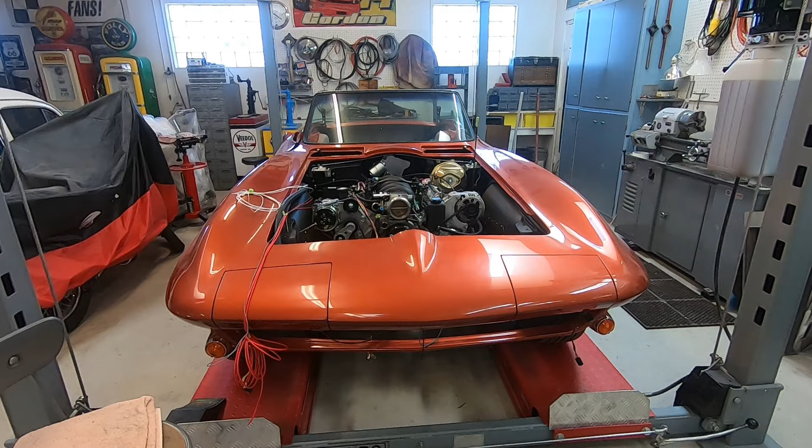It's been a while, but the body is back on the frame now. So I'm going to go ahead and put the condenser onto the radiator, get that installed, hook up my hoses, my electrical wires, try and get everything under the hood finished.

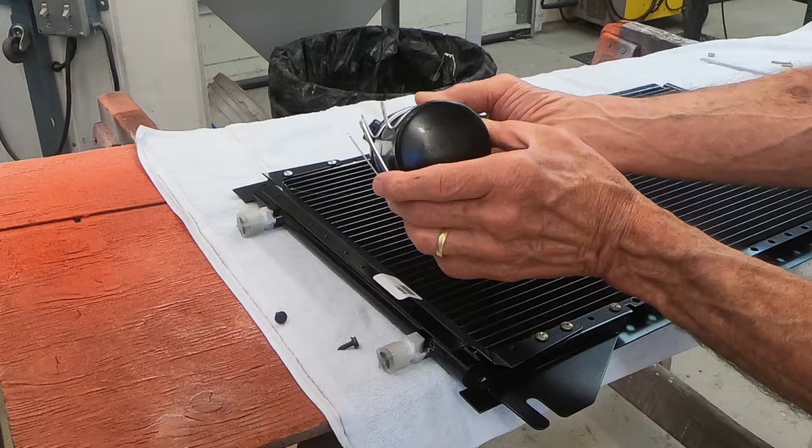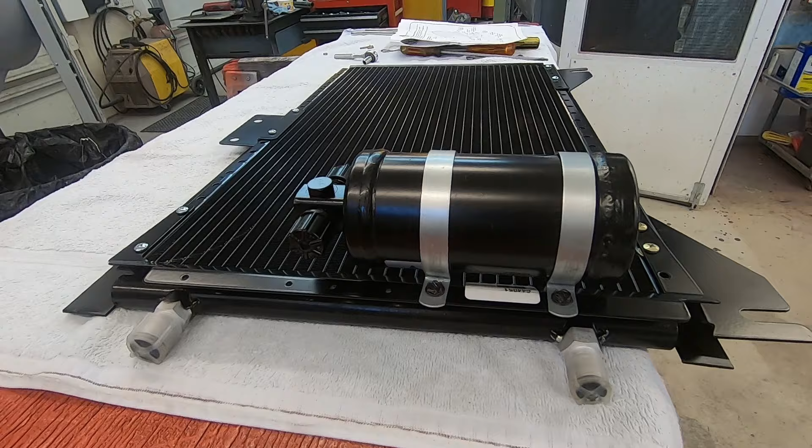Dryer will bolt right there with these clamps, just like that. And it does have a flow direction, so you need to pay attention, make sure you get that in the right direction. Just a couple screws right here that hold it in place. Now I've got this little line that will attach the dryer to the condenser right here.

If the little rubber plug doesn't come out with the cap, be sure to remove that. We'll drop a little mineral oil on them.

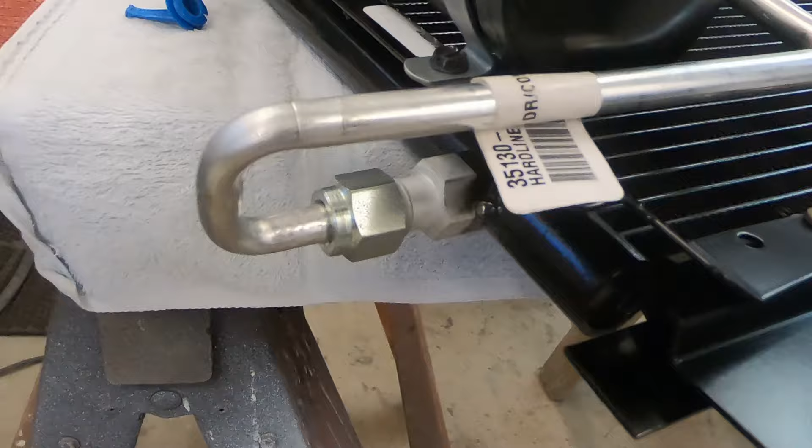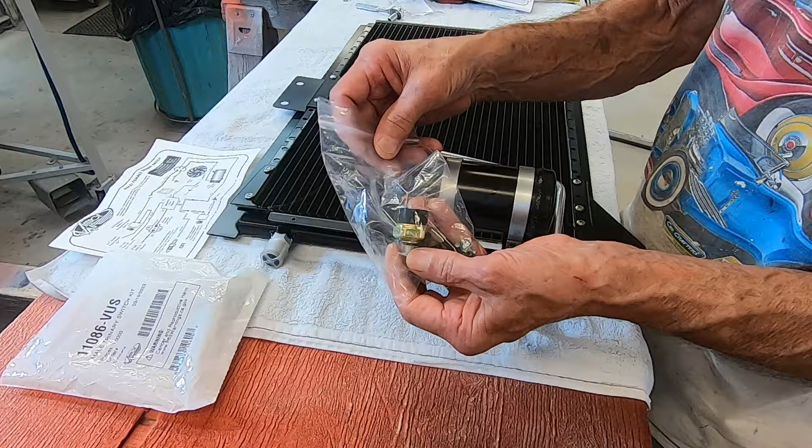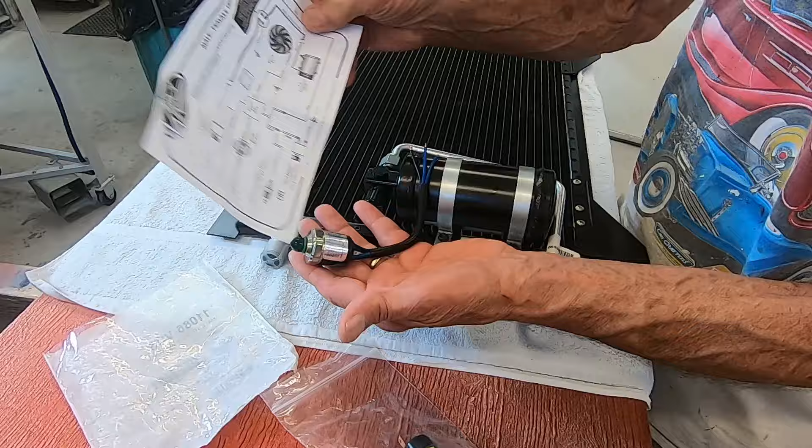One more thing I need to do to this condenser assembly before I mount it on the radiator support is put either a binary or a trinary switch in the system, and it's going to go right here at the top of this dryer. The kit comes with a binary switch, got 2 prongs on it, but I bought the optional trinary switch. That's this one here. It comes with the switch and the instructions, and it's got 4 wires coming out of it.

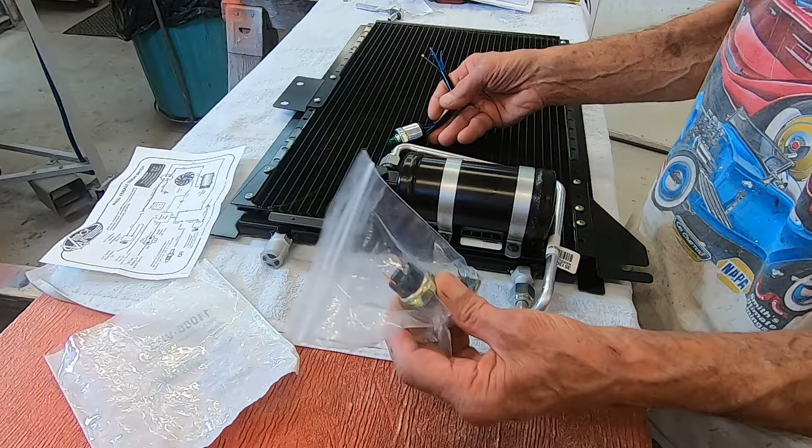And if you have electric fans, which I do, the trinary switch is what you want to have. The binary switch protects against an overpressure or a low pressure situation. It'll cut the compressor off. The trinary switch, 2 of the wires perform the same function as the binary switch, but then the other 2 wires will automatically kick the fans on anytime the air conditioner compressor comes on, because you don't want to run the air conditioner compressor without air flowing through the condenser.

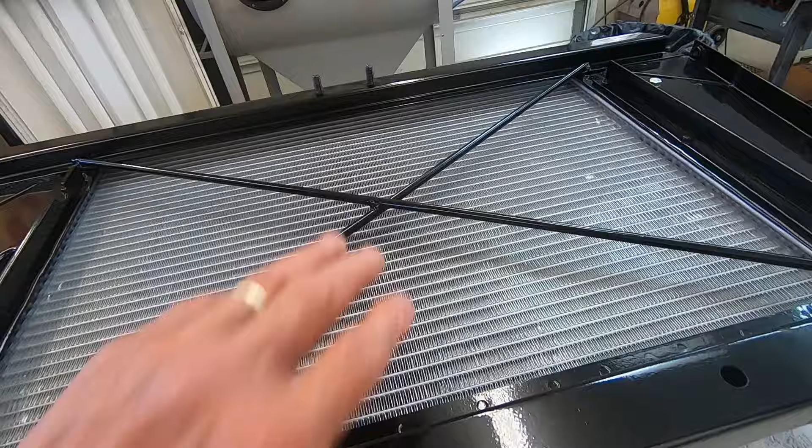It's got a little O-ring, so we'll put a little oil on that. I'll snug that down, and then that's installed. The condenser will just mount right on the front side of the radiator support, front of the radiator. This radiator I'm using has got dual electric fans on it. It's a DeWitt's brand radiator, really nice, high quality radiator, all aluminum.

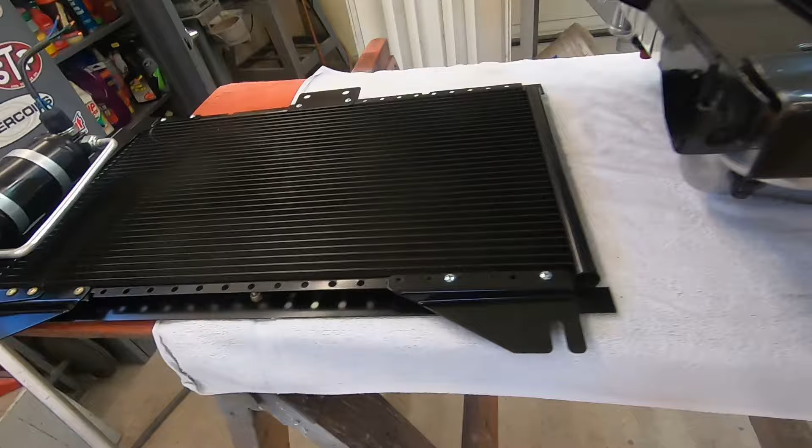And before I set the condenser on there, I'm going to point out a couple of extra things I did. You see these little angle brackets here running the full length on both sides are just made out of aluminum. I've got notches in them for the fittings coming off the condenser. On the condenser, I've got these sheet metal extensions, top and bottom.

It just lays right in there. A couple of nuts go on here, and I won't put bolts through here yet. There's 2 bolts that'll go here and here, but once it's in the car, I've got some little support pieces that go from here up to the fiberglass body in the headlight area.

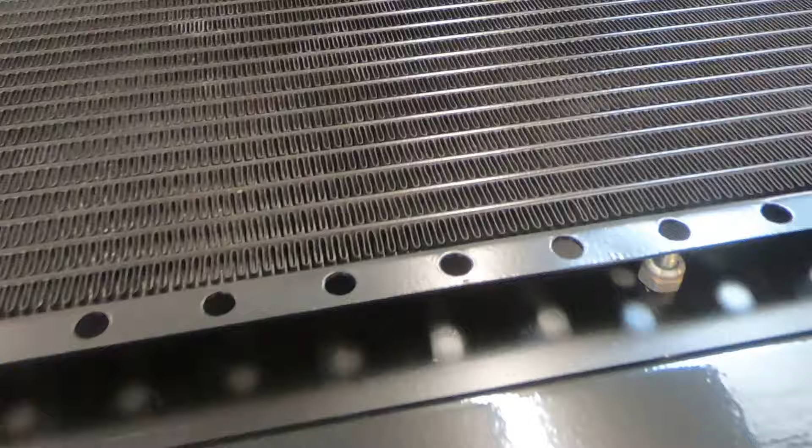And the reason I put these pieces along the bottom here and these angles on the side is just to keep air from sucking in around the sides of the condenser. Now all the air that gets pulled through the radiator also gets pulled through the condenser.

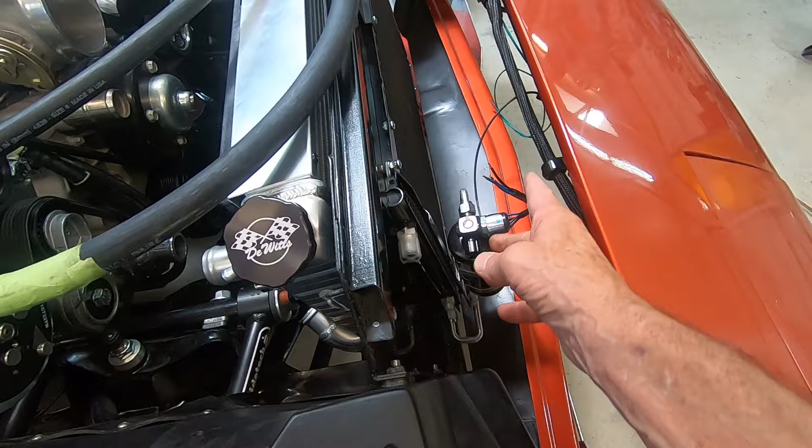Got this all bolted down now. So now I can run my electrical wires off this trinary switch. But before I do that, I think I'm going to go ahead and make my hose connections, get the hoses routed, and then I can run the wiring. It'll be easier to route the wiring around the hoses rather than vice versa.

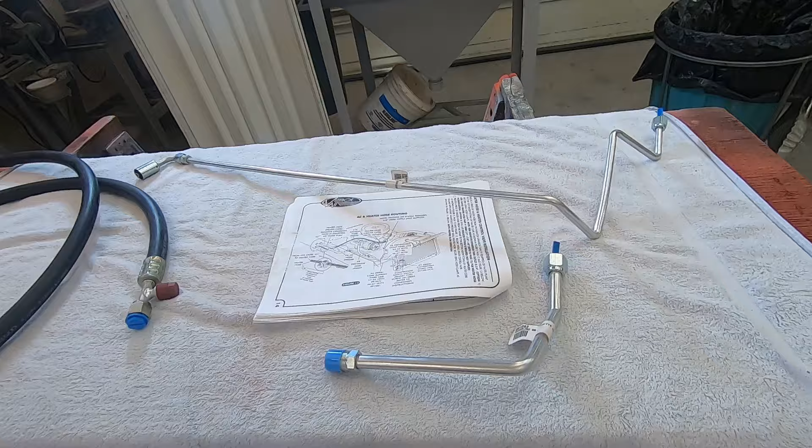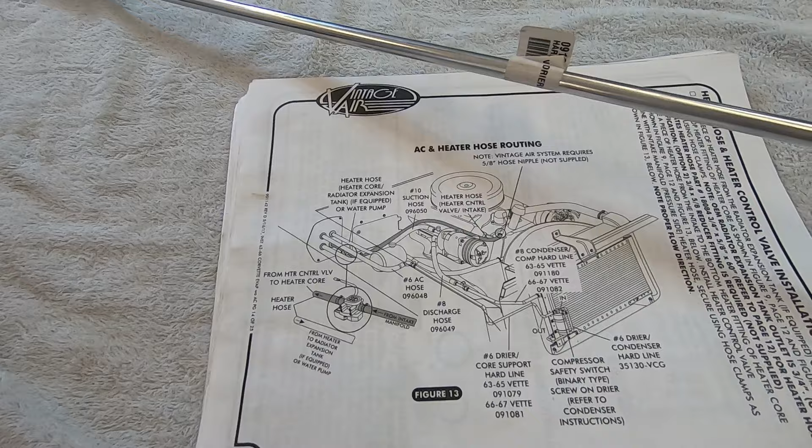I've got a couple of hard lines that go in there. This is another number 8 line with a fitting on it. And basically the instructions are pretty self-explanatory as to how the lines are routed. I've got my hard lines attached, and I had to kind of bend them around just a little bit to get them to fit, but it's aluminum tubing, so it bends real easy.

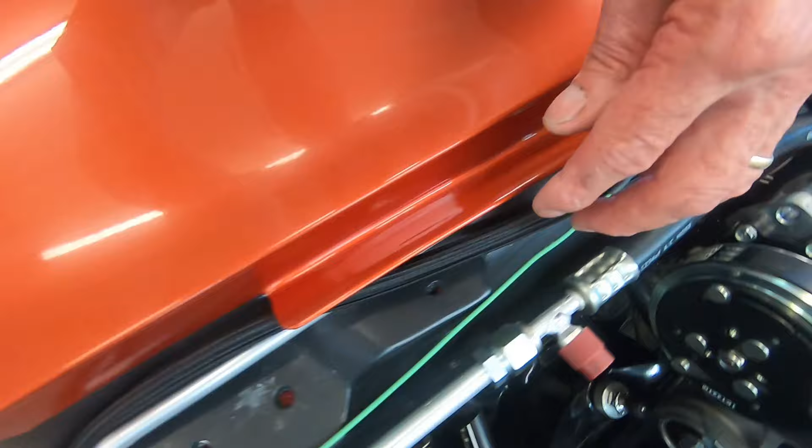And I've got my hoses cut to the proper length. I've still got to crimp these fittings here. There's another one right around the corner here. Now I'm going to take this wire off of the compressor, and I spliced in an extra long lead right there because I'm going to tie that into this harness, which is running along here, carrying the wires to my electric fan. So I'm going to feed this into this harness, and then it's going to come down and around, and then it's going to come out right here.

And this green wire coming from my compressor is going to attach to one of these black with a green stripe wires off the trinary switch. The other black wire with a green stripe is going to attach to this blue wire, which comes from the AC relay, which mounts inside the car.

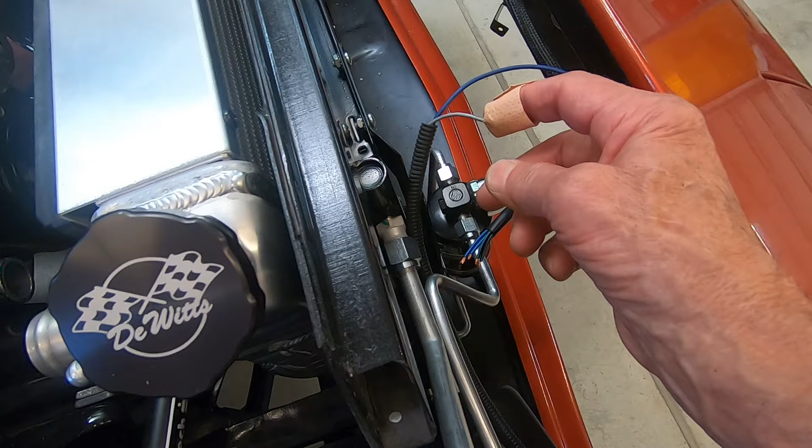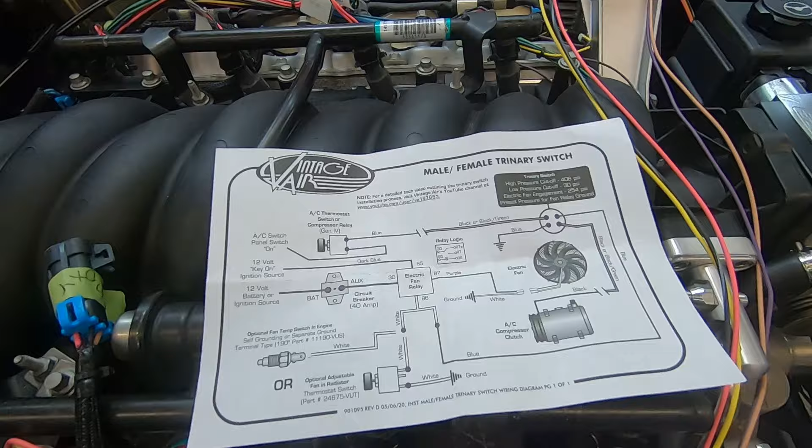And then the 2 blue wires that are coming off of the Trinary switch, one of them goes straight to ground, and the other one is going to splice in with this gray wire here that is coming from my fan relay, and it's going to feed through here, and I'm going to attach both of them right here to this little temperature sending switch that's mounted in the radiator. And basically I'm just following instructions on the Vintage Air Trinary switch schematic.

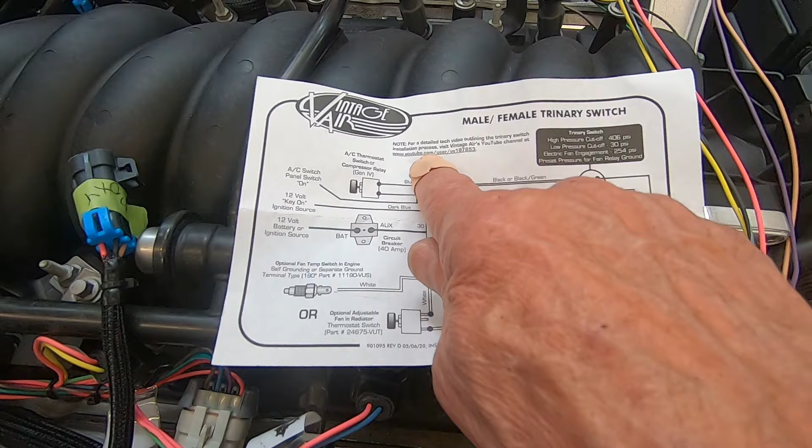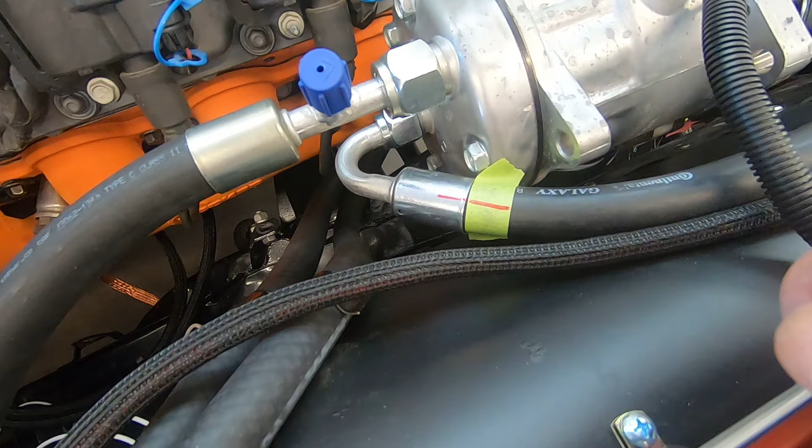That was helpful. I'm getting ready to crimp all these fittings. This one here I'm going to do first because I can take it out of the car. And what I did is put some tape around the hose and then made a mark on there, so when I get it out I'll be able to get it aligned properly. Here it is all set up and ready to go. This is just a little beadlock crimping tool that I bought. Comes with all these different size dies for the different size hoses.

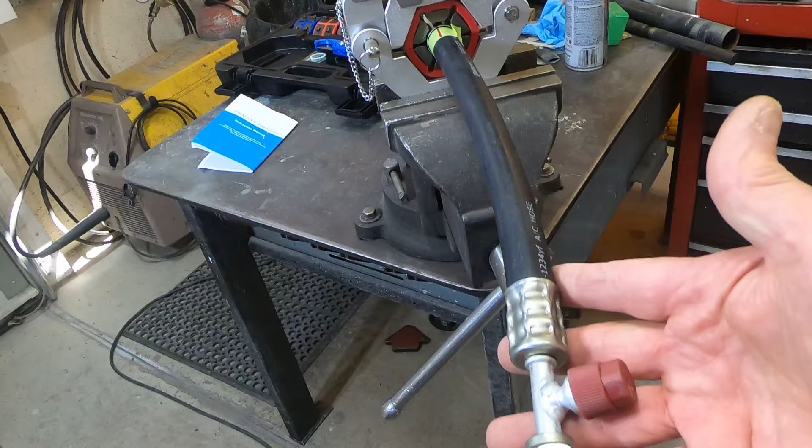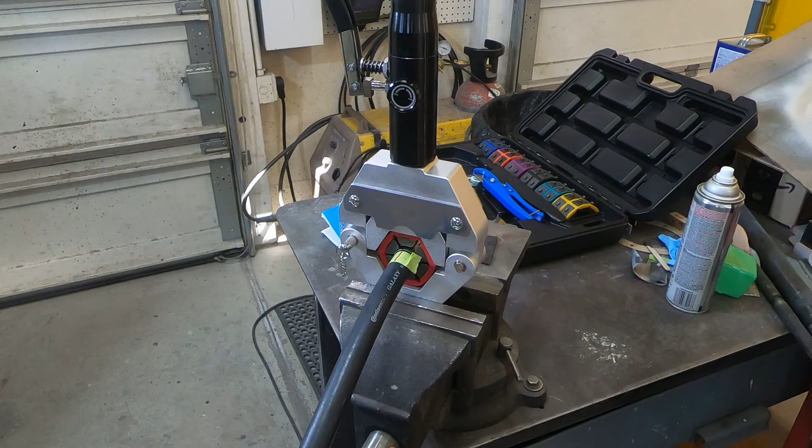And in the past I would just take these hoses to a shop and let them crimp them for me, but I don't want to pull those hoses out that are already attached to the evaporator over there. So I bought this tool off of Amazon. It was 115 bucks. So I'm going to just try and do it myself. I'm making sure my marks are lined up, and I put the tape right at the edge of the fittings because if it gets pulled back I'll be able to recognize it easily. So it's right there. So I'm going to go ahead and start crimping this down.

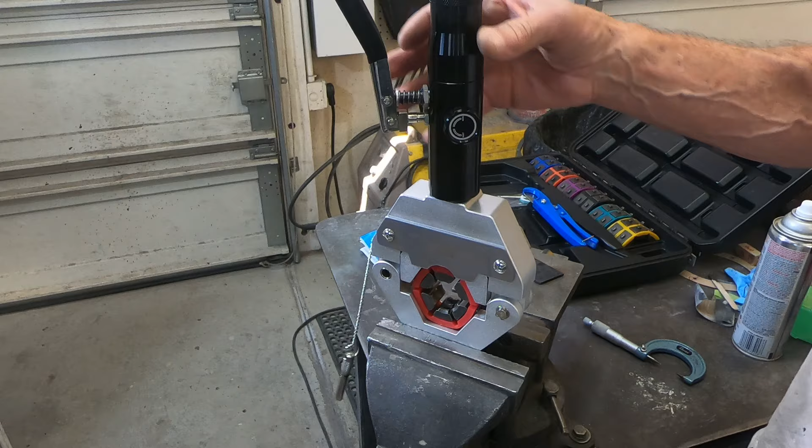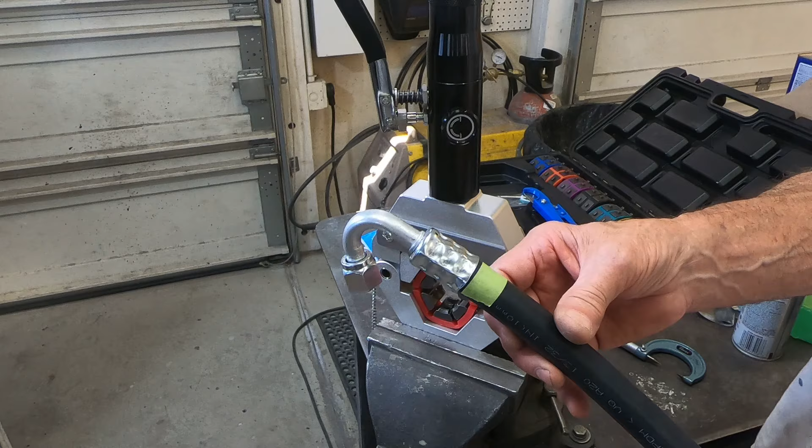Basically what it turns out is you can compress this until these jaws are all touching each other, and then that puts you right where you need to be. So there's one done. Looks pretty good. That's what came from Vintage Air. Theirs might be a little cleaner than mine, but they probably have a lot more expensive tool than this one.

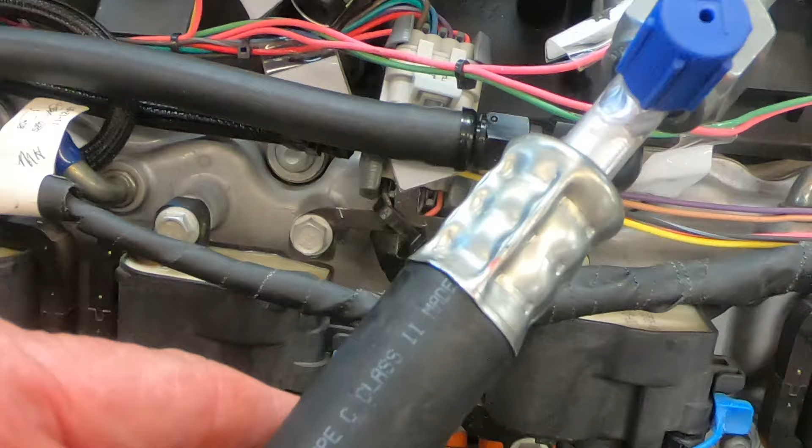All right, I just did this big number 10 hose. And what I'm finding is that you need to, at least on this tool I got, crimp it from 2 directions, 0 and 90 degrees. If you just do one direction, some of the crimps don't look like they're completely put in there. And so if you rotate it 90 and then crimp it again, it gets to be a lot more uniform all the way around. So that's that one. And now I've just got this little number 6 hose to do.

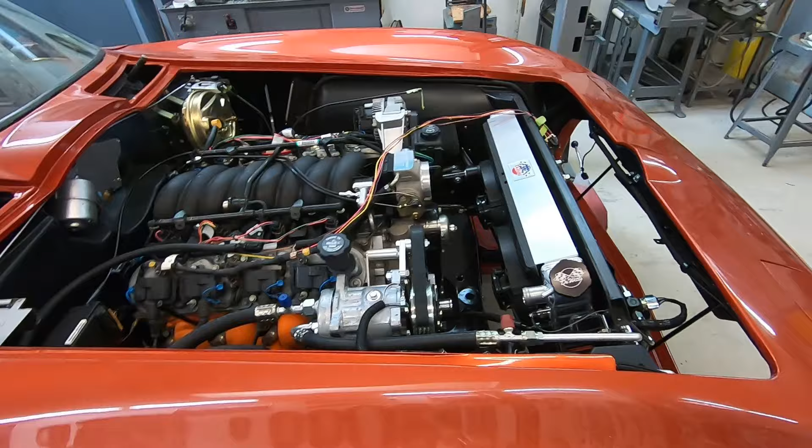Okay, I've got my number 6 dies in here. Got my marks made right there where it needs to be oriented. Make sure the hose is pushed all the way in, start cranking. And I believe that concludes everything that needs to be done under the hood.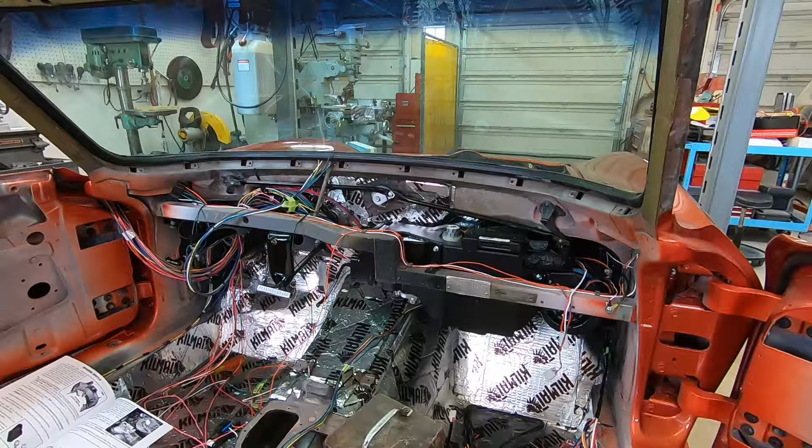I don't have the dash back in yet, but that will allow me to go ahead and easily hook up my wires. This harness here comes from the firewall, and on the other side I've got that circuit breaker and the positive battery hookup, and then also negative battery hookup, and then the other wires that run out to the compressor and the binary switch, what have you. So I've got a couple connections to make in here. They give you a lot of extra wire, but basically there's only one way it's going to go. You've got matching connectors that'll go together here.

Got this connector goes into this one. This connector will go right in here. And then I've got this separate harness, which is for your switches that are going to go over here. It'll plug right in here. And then this relay, it's got a hole for a screw. I'm going to tie it up here somewhere. I'm going to see how best to route these wires and get them tied up.

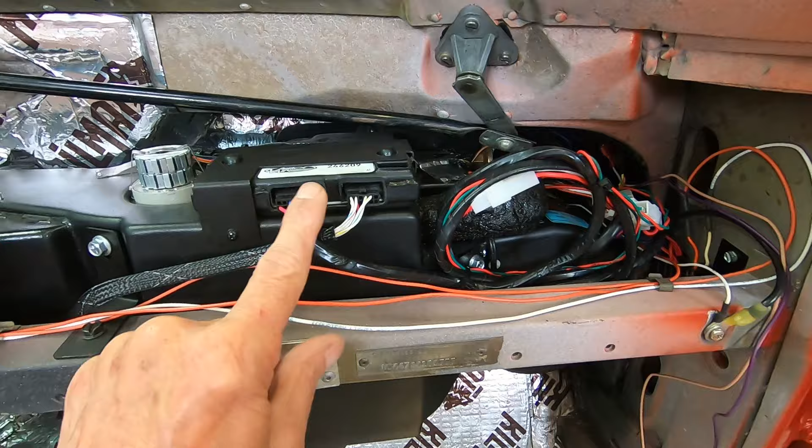Had a little change of plans on this routing of the wire. Coming up from the bottom here, it was just getting too messy. So I rerouted them up behind all the hoses, came out up through here, made all my connections, and then looped the excess wire together and cable tied it in a few places, cable tied it down here too, and then it can just rest right there. And then when the dash is in and the glove box goes in, the glove box goes right up against here. So they're out of the way, they're not going anywhere.

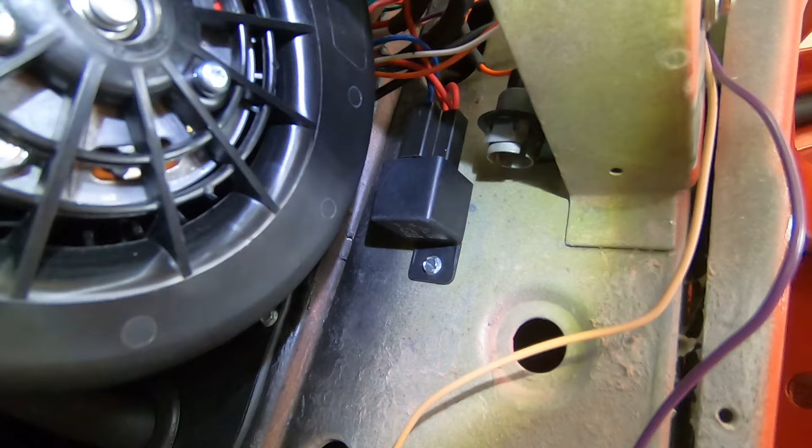Just need to be careful not to get anything in the way of your windshield wiper arm here. My relay drops right down there. And I just drilled a hole, put a screw in it to hold it in place there.

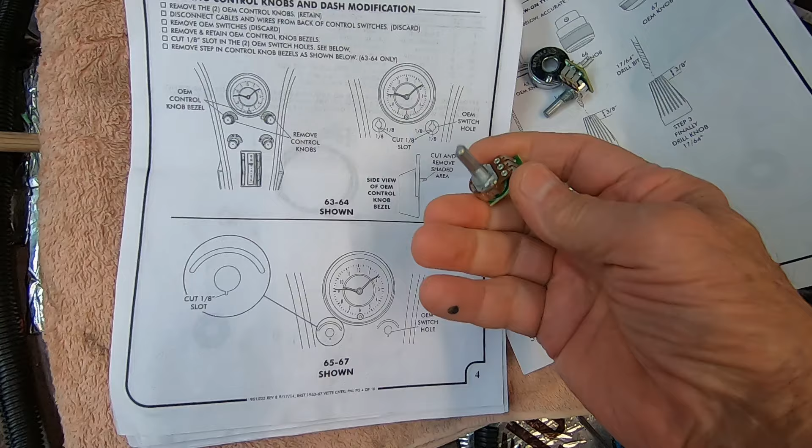Here's what the switches look like. And they've got a little tang on them right there. And you've got to cut a little slot. They're showing you right here in your dash for that tang. I've already done that on mine. Two of them will go in the dash right here, and the other one will mount in that little cover that goes on the side right here.

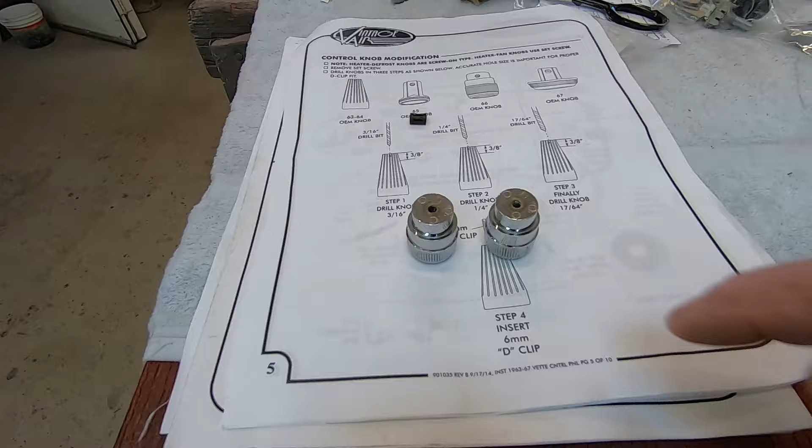And then the knobs need a little modification. I got new knobs here. These are the ones with the threaded hole in them for the defroster pull cable. And you've got these little D-shaped clips that get pushed into there once those holes are drilled out to 17/64. And then that'll allow them to mate with the switches.

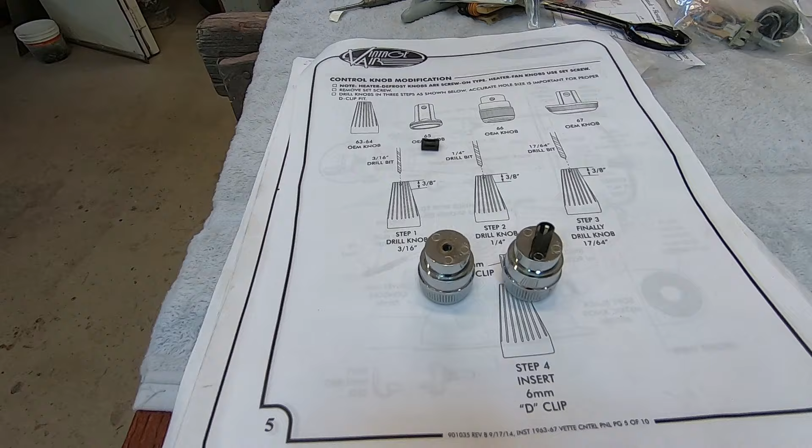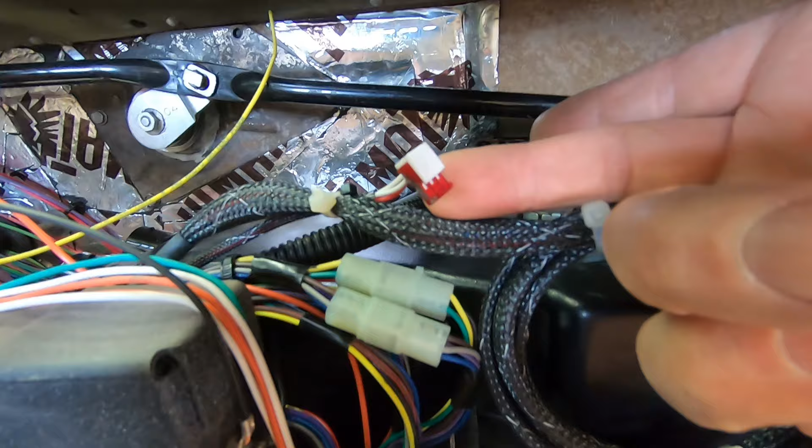Got my switches in, my knobs in place. With the excess wire going to those switches, I just looped it up here. The one switch connector that doesn't get used, I just cable tied it back on the harness there. And I've got one more switch that plugs into this connector that will mount right about here, like I say, in that side cover.

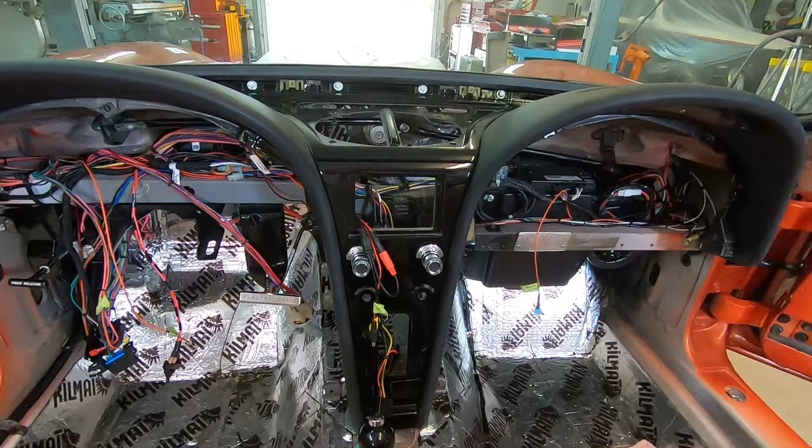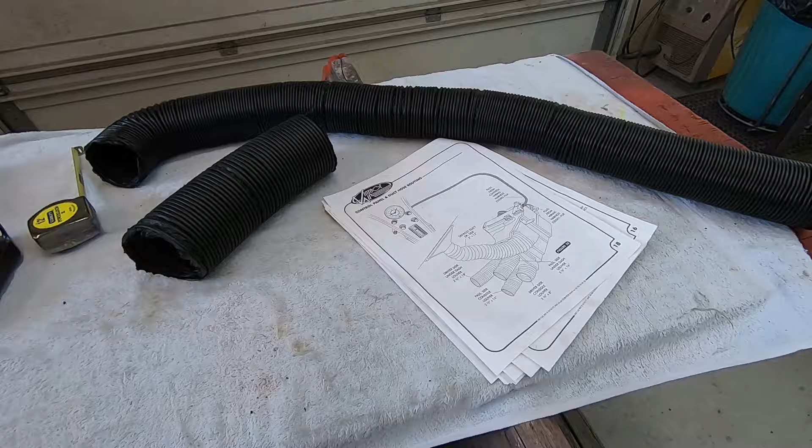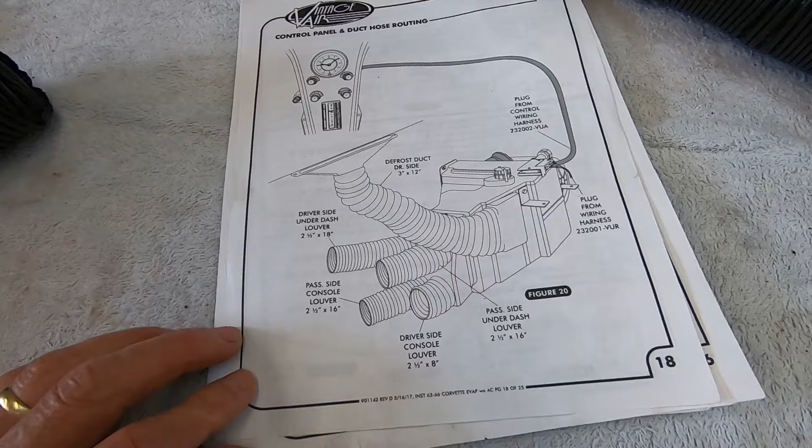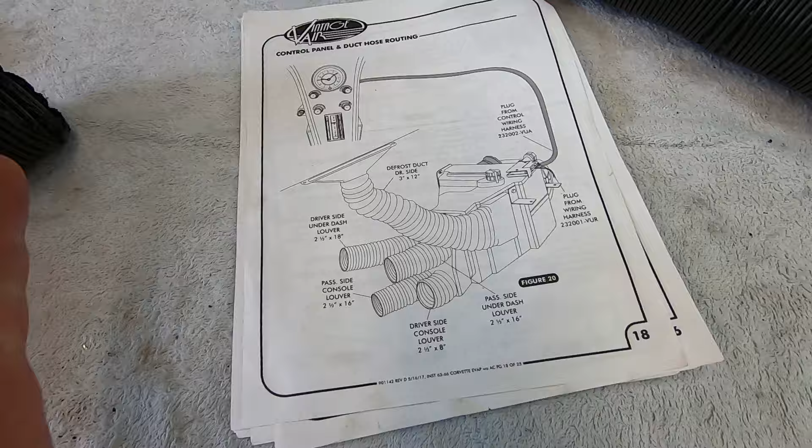Most of the wiring is in and tied down. So now I'm going to get in under here and hook up all my ducting to these ports here. What you get in the kit is some of this stuff, which is a little bit larger diameter, and it will go for the defroster. And then this other piece here gets cut into 4 different lengths and gets hooked up just like it shows here. The 3-inch goes up here to the defroster duct. This side goes to the driver's side, passenger side, and then these two here will go on either side of the console. So I'm just going to follow the instructions, make those connections.

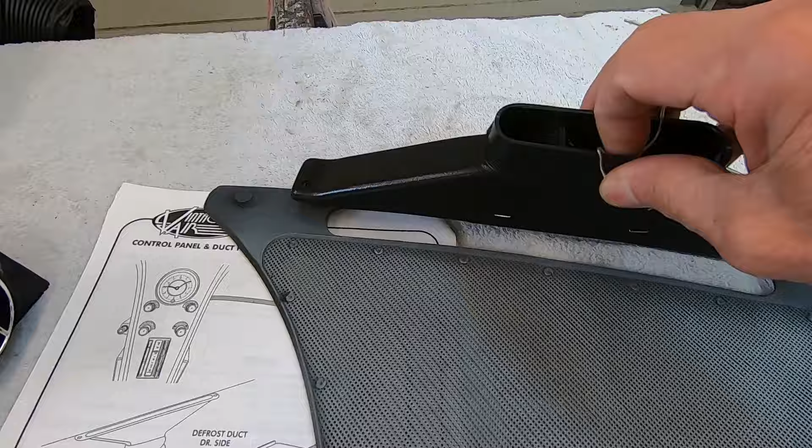This is the defroster louver that they give you, and it actually is going to attach right to the back side of the speaker cover, like right in here. And then of course the speaker goes in here, so all three of these items are going to have to kind of get assembled at the same time.

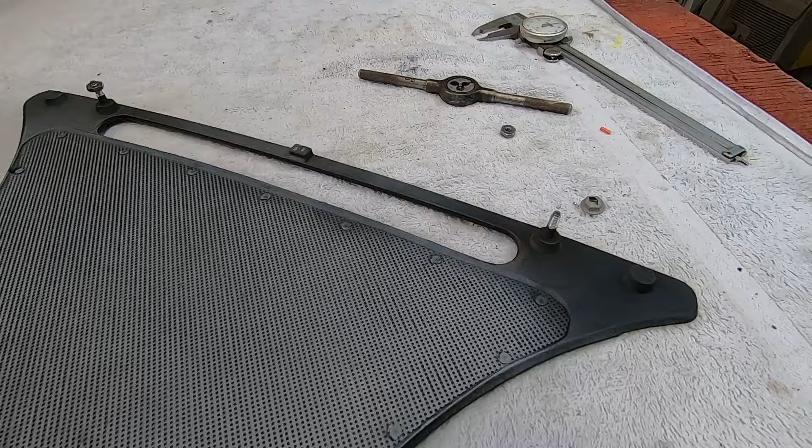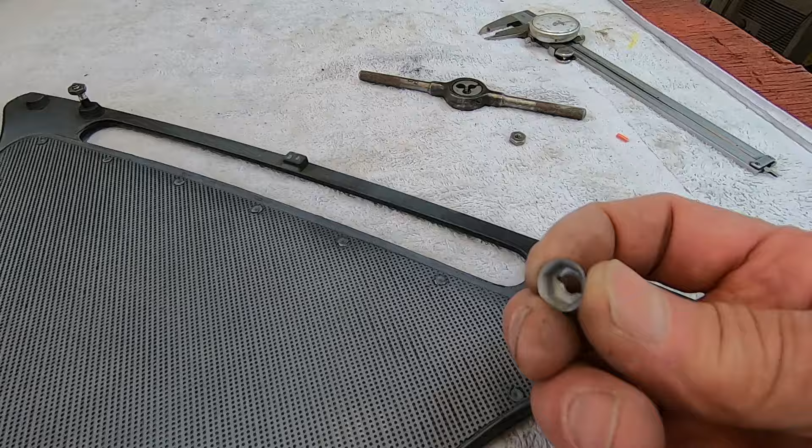I ran into one little problem over there. I was trying to put the speaker grill in place, and these studs that go closest to the windshield don't stick quite far enough through the defroster duct in order to get the nut started. This is the type of nut that was on there. It was just kind of a self-threading castle nut, or whatever you call this. But you can see you've got to get to the full depth of that thickness of the nut before you start engaging any thread, and I just didn't have enough stud sticking through to do that.

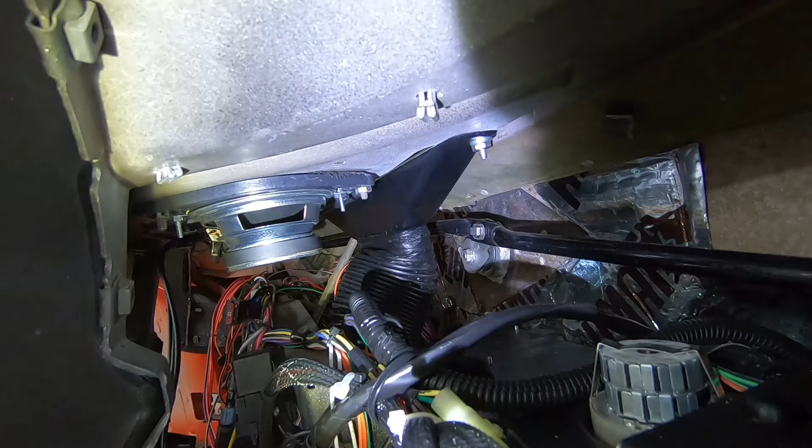So what I did is I took a die and chased some number 10-24 threads on here, and I can just use a regular nut, and hopefully that'll get started and I can tighten it down. It'll work just fine. Here's what it looks like installed.

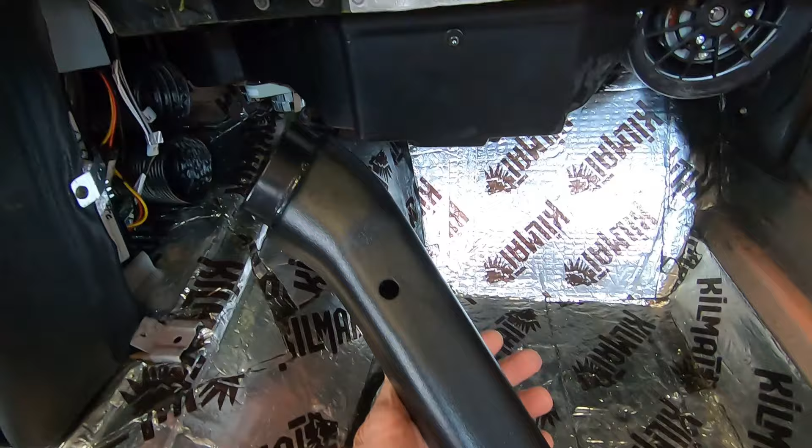I've got two ducts coming out right there. One's going to feed the outlet here on this little side panel, and the other one is going to feed this piece that mounts right up under here like that. And to mount it, I've got to drill a couple of holes right up in here and in here. That'll hold that in place with a couple of screws.

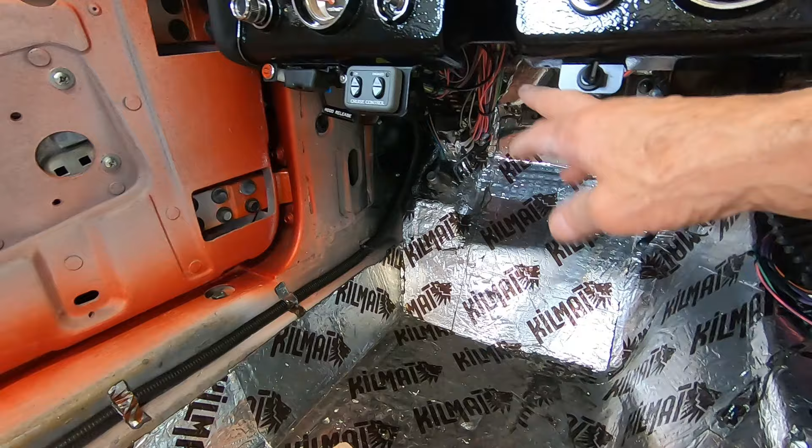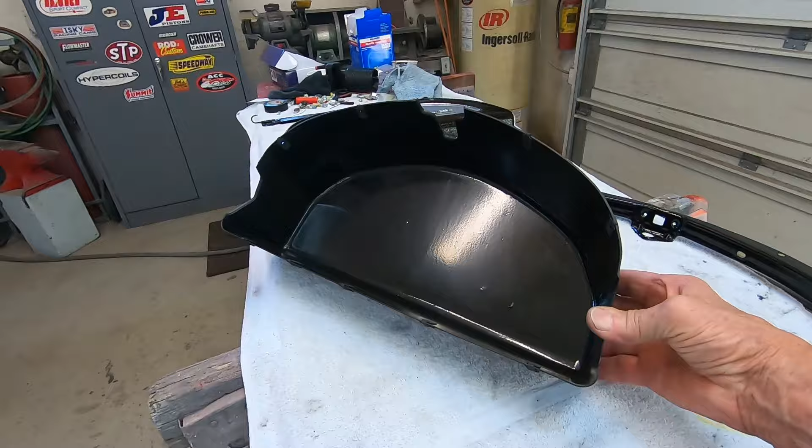And this one over here, you see it's got this bracket on it. It will go in right under the steering column and bolt to that U-bolt that goes around the steering column right there. I got this vent attached over here. Now I believe I'm ready for the glove box. And they supply a new glove box, which is not quite as deep as the original. It's got these little clips around the perimeter, so it'll attach to the frame just like the original one does.

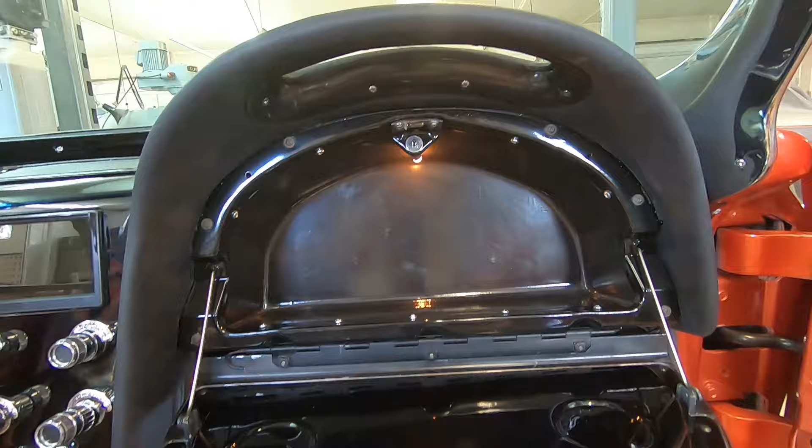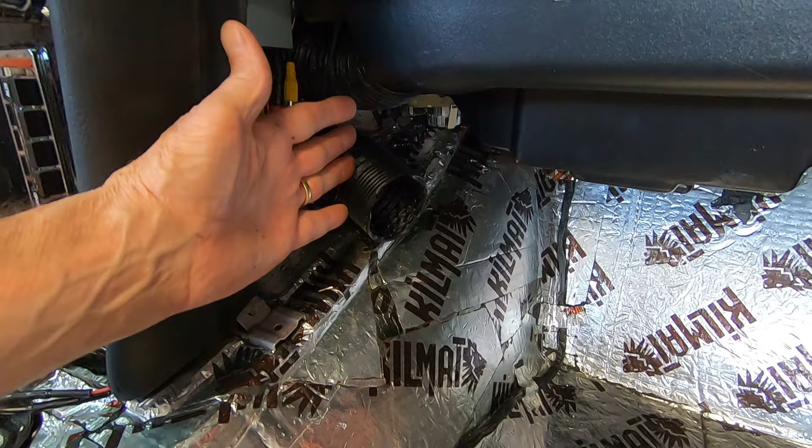Okay, I'm going to end this video here. All that's left is when I get my carpets in, my console in, and put these little side covers on, I've got to hook these ducts on here, one on each side. And then once I finish with the car and get it going, I've got to, of course, add Freon to the system.

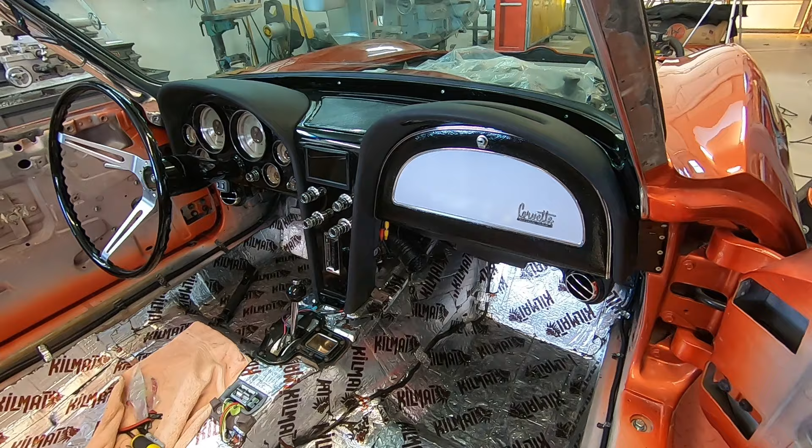And as you can see, it was a lot of work, not easy. I'd say just give yourself plenty of time and you can get it done. And next summer when it's 100 degrees outside and you're nice and cool in your Corvette, it will have been well worth it.